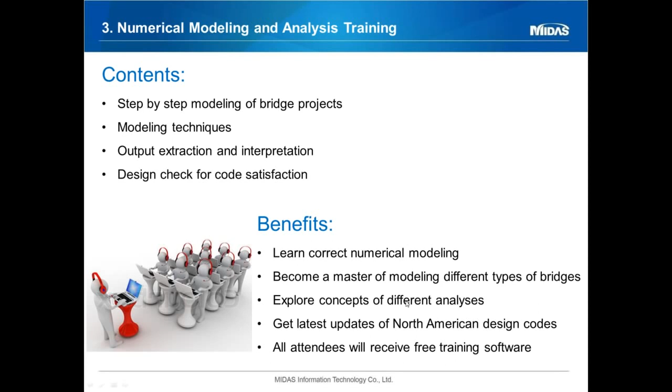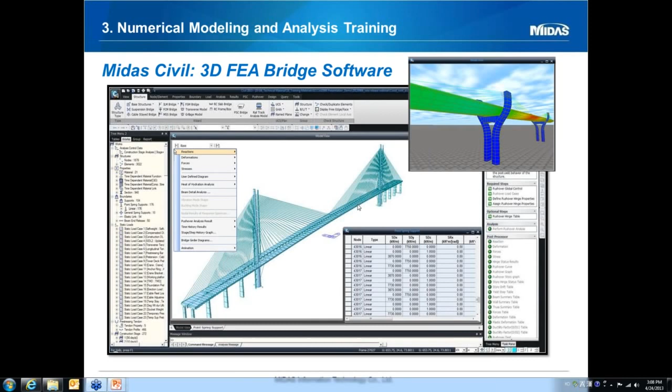Thank you. So today I'll be speaking about the modeling of a geometrically complex box girder bridge. Here's a brief overview. First I'll be discussing the bridge geometry of the structure that I worked on. Next I'll be going into the model requirements, what we needed from these models, the evaluation of various model types, and the modeling approach for both a grillage and a plate model.

I'll also discuss some of the challenges faced and the solutions I came up with for this project, and I'll discuss the methods that I used for evaluating the data.

So here is a plan view of this structure. It's a local bridge over Interstate 70 down here in Denver, Colorado. As you see, it's not symmetric in any real way. You have the flared webs out here that bifurcate.

So out here on the wide end, we have 6 webs. Get here towards the middle, we're reducing that down to 4. These webs vary along the same radius, but they terminate at different locations.

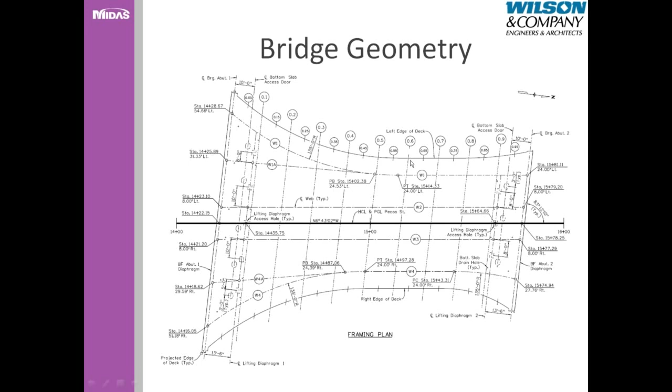And if you'll note these lifting diaphragms here, those were used in, well, will be used in moving the structure once it is completed.

Here's a look at a few of the cross sections of this bridge. You'll see that the key word is 'varies' - nothing is staying real constant along the length of the structure. I think the only thing that does is the spacing between webs 2 and 3. That remains 16 feet throughout the entire length of the bridge. Just about everything else changes.

This illustration up top is showing you a cross-section between abutment 1 and the first lifting diaphragm. In this region, the top and bottom slabs are constant thickness - a foot on the top, 8.5 inches on the bottom. And then we have the overhangs that vary in thickness and width.

In between the lifting diaphragms, this bottom slab varies. The way it was constructed, it varies linearly from lifting diaphragm 2 to lifting diaphragm 1, or vice versa.

So it's thicker at the wider end of the bridge, and it gets thinner as we get towards the narrower side. Up here, the deck varies in thickness. It's haunched over all of these webs.

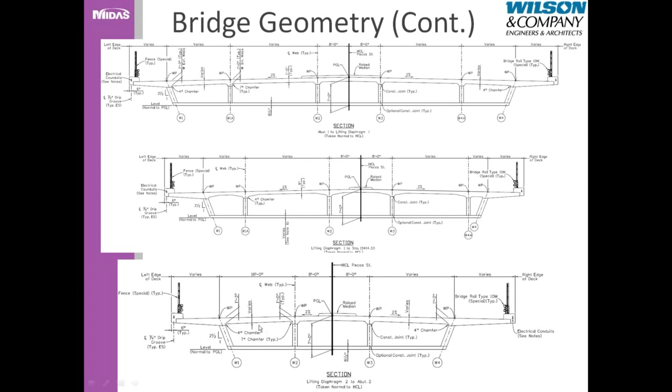Out here, we're looking at lifting diaphragm 2 to abutment 2. This is pretty similar to the other end, where the bottom and top slabs are constant thickness, except out here in these exterior voids, where we're going from 1'3" to 1 foot.

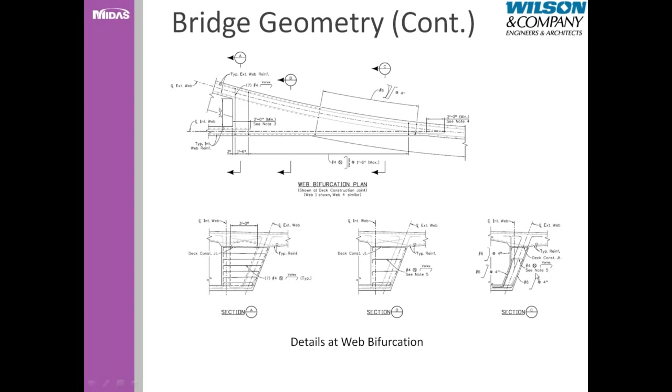Here's a closer look at the web bifurcation. There's kind of a transitional zone here where there's some extra concrete. Take a look at section A - you can see that this gap between the webs is filled with concrete. As we get closer to the termination of this web, this is the cross-section here.

So just kind of a summary of what this bridge is. It's one simple span, a little over 150 feet, 156 feet long. It's a cast-in-place, post-tensioned concrete multicellular box girder with about a 6 3/4 degree skew.

The width varies from 54 feet to 117 feet, and the web spacing varies from about 16 feet to 23 feet. One thing that made this project interesting is that it is being built off-site and will be moved in place using SPMT equipment. Internal and external post-tensioning was used for the structure.

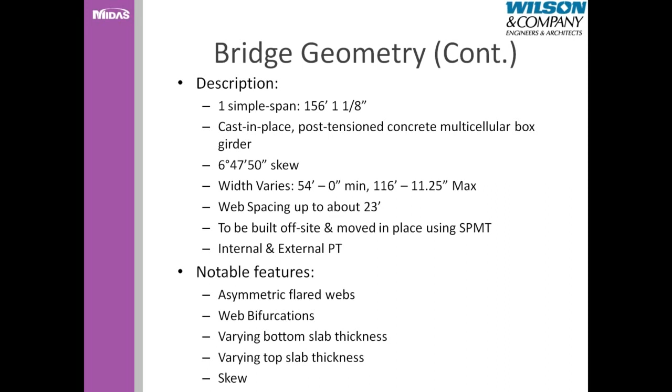Some notable features, especially in terms of modeling this bridge, are the asymmetric flared webs and deck edge as well. The web bifurcations, the varying bottom and top slab thicknesses - it's dependent on location - and the skew of the bridge.

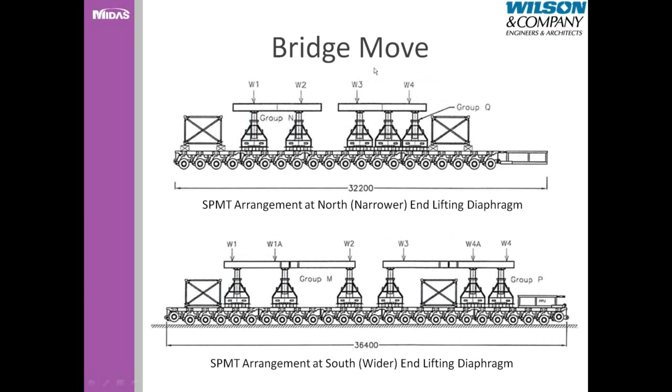Each of these mega jacks in each group are going to be set to where they have equal reactions. They'll be hydraulically connected to maintain that requirement. So both of these will have the same reaction throughout the entire move, same as these three together, and these three together. The different groups will have different pressures and reactions, but within each group it will be the same.

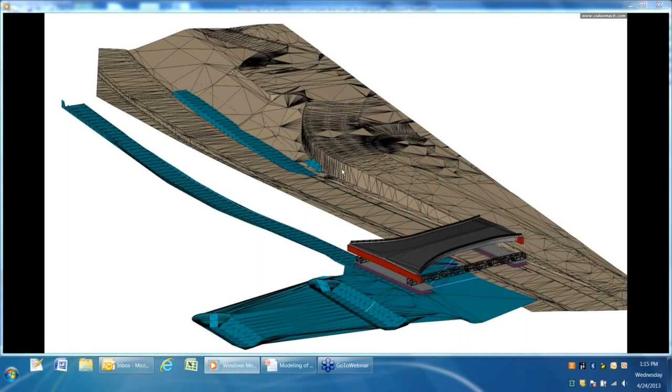Here's a brief video showing the move itself. Due to the site where they built it, they're going to have to drive it out onto the interstate and turn it around 180 degrees. You see the blue here - that represents the dirt work that's going to have to be performed between the closing of the interstate and this move actually taking place. And you can see it's going to drive right there into its final location.

So now I'll discuss the model requirements, what we were looking for from the models that were created. First thing is really the thing you're looking for anytime you're making a model - we're aiming for a realistic distribution of forces, especially during the SPMT move. We're looking for a good idea of the forces in the diaphragms. We wanted accurate bearing reactions, considering the elastomeric stiffness.

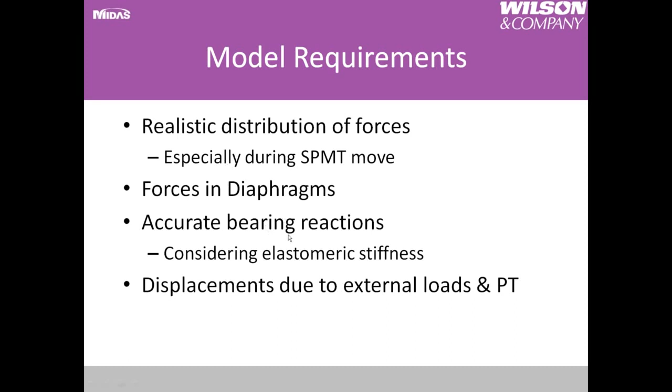We're looking at the displacements due to external loads and post-tensioning. We also wanted to know about the global torsion in the final condition, and we're especially looking at this during the move.

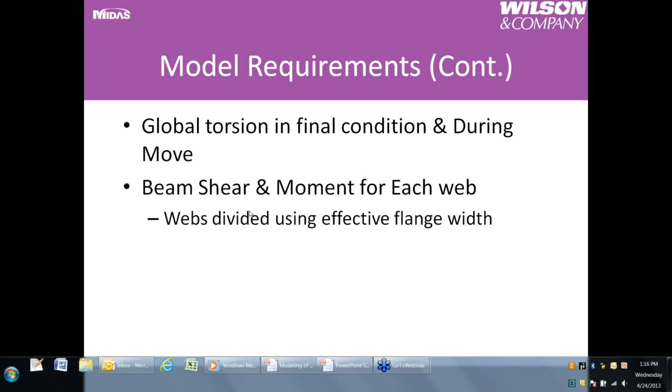And we were designing a bridge, so we're looking for beam shear and moment. The way it was designed, each web line was designed individually, so the webs were divided using the effective flange width. So from the model, we needed the shear and moment.

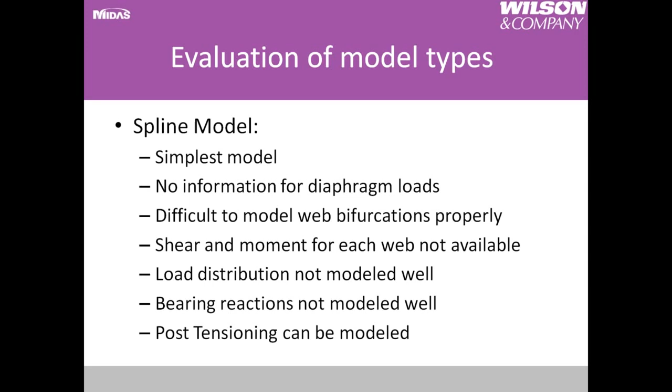So here's a little evaluation of the various model types that were considered. The spline model wasn't considered real closely - this is the simplest model. It gives no information for the diaphragm loads. It's difficult to model the web bifurcations well. The shear and moment for each web are not available - it just gives you one value for each location along the length of the bridge. The load distribution is not modeled well, and bearing reactions are not modeled well. As a plus, post-tensioning can be modeled in there.

Next step up is the grillage model. This is a relatively simple model. The diaphragm loads are not as accurate as those from a plate model. In this case, we can model the web bifurcations with a little more accuracy. The shear and moment for each web are readily available from this model, so that was a plus. The load distribution is not modeled as well as it was in the plate model - it doesn't consider everything that's going on in this box girder. The bearing reactions were not as accurate as those from the plate model, and the post-tensioning can be modeled well using the grillage model.

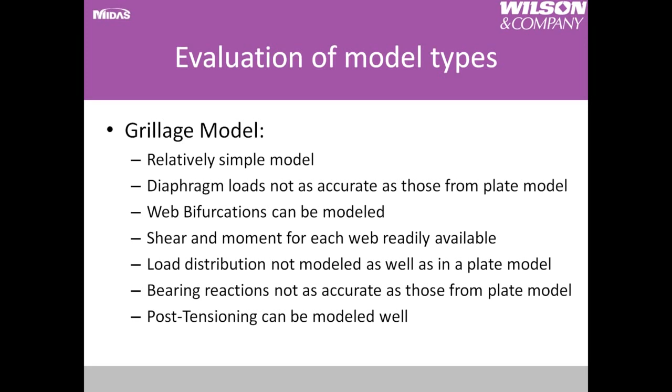Taking a look at the plate model, this is the most difficult to model.

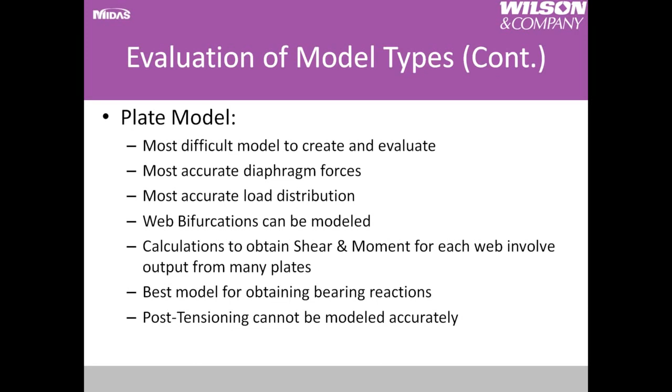It's the most difficult model to create and evaluate. It's the most accurate in terms of the diaphragm forces, in terms of the load distribution, and for the bearing reactions. Some of the negatives of the plate model were that the calculations to obtain shear and moment for each web involved the output from many plates and required a fair amount of work to obtain those. And the post-tensioning could not be modeled accurately.

So the models selected for this bridge were a grillage model and a plate model. We used the grillage model to ensure reasonable results from the plate model. That was important since going into this, the plate model is fairly complex, so it's worthwhile to put forth a simpler model to validate what we're doing in the more complex model.

I used the grillage model to get information about the post-tensioning, so that was looking at losses and also deflections. And also the bridge rating was performed using the grillage model. Main reason for that is that the model input and output were far more easily interpreted than the plate model. And I felt that was a worthwhile goal when considering the bridge rating.

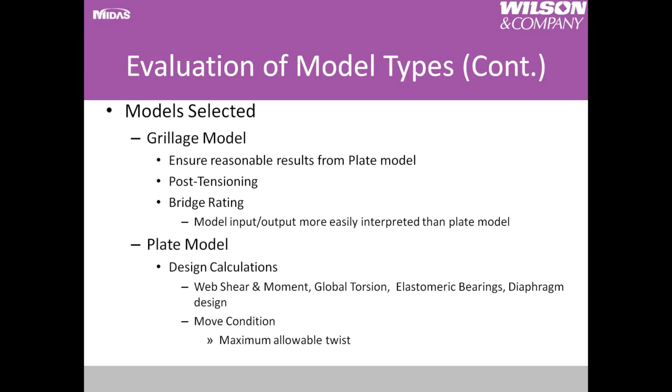The plate model was used mainly for the design calculations, including web shear and moment, global torsion, the elastomeric bearings, and the diaphragm design. This model also came into play for the move condition. I feel it was very important when considering this move condition, since it did do a good job considering the different variables at play for this bridge.

So the modeling approach. First model created was the grillage model. First step was to determine the node locations. Next is to create member cross-sections.

The south half of the bridge has at least one dimension varying with respect to distance along the bridge. As a result, there were many unique cross-sections. The next step was to create elements and assign cross-sections to the elements. Then the boundary conditions could be put into place.

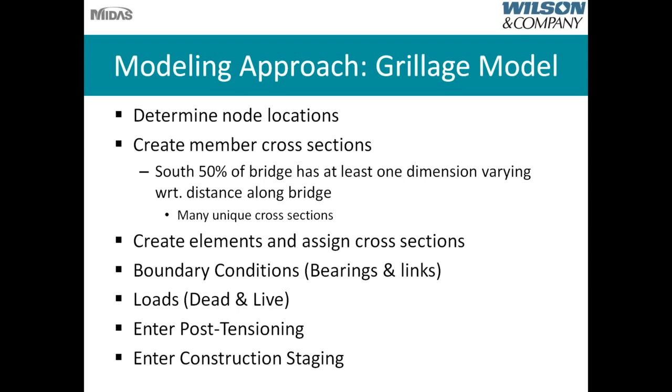So that's the point springs for the bearings and the rigid links to connect the two exterior webs together at the bifurcation, and also to connect the top and bottom slab for the transverse elements and connect the transverse elements to the longitudinal elements. Next, the loads had to come in, and the post-tensioning and the construction staging to get a good feel for the time-dependent effects on this structure.

So here's kind of an overview of the grillage model. The top image is showing you the grillage model longitudinal members only. Midas allows you to take a good look at the geometry you're putting in. Each of these cross sections was entered individually.

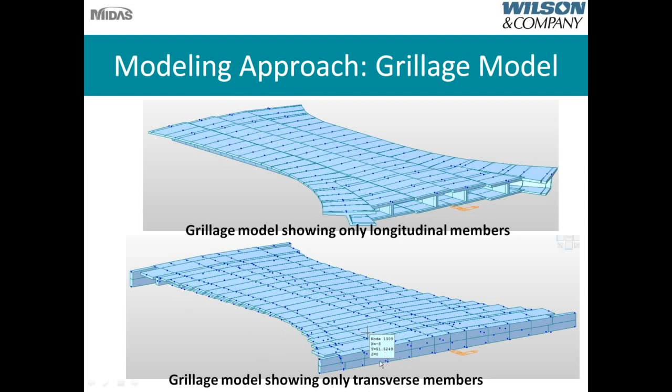And then taking a look at the transverse members here, we have the top slab, bottom slab, the end diaphragm, and the lifting diaphragm.

Looking at the plate model, first step was to determine the node locations. This required significantly more effort for the plate model than it did the grillage model, since there are many more nodes, more things needing to be defined.

Next step was to define plate thicknesses to represent the concrete along the bridge. Then the elements needed to be created and the thicknesses assigned appropriately. Next step was to input the boundary conditions.

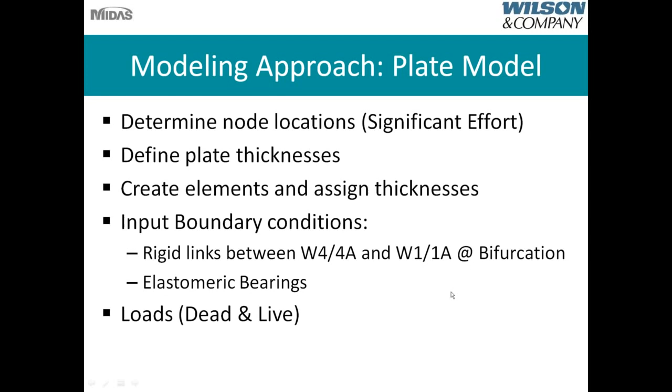So rigid links were placed between web W4 and 4A. Again, at the bifurcations, they're rigid links. And then the elastomeric bearings were modeled using point springs. Next, the loads were put in, dead loads and live loads.

So here's the plate model that I created for the structure. This top view shows, as you would be looking at the bridge from an isometric view, you see the bearing diaphragm out here at the end. On the top, you see all the deck elements, and then you can kind of see the diaphragm poking through here too.

Here is a view with the top deck hidden, basically inactive, so you can see the webs and the diaphragms with more detail. You can see in here, these are the lifting diaphragms, and then you can see along this web where the bifurcation takes place, these webs were thickened to represent that transitional area where there was more concrete placed to kind of stiffen up and strengthen that connection. Same thing over here.

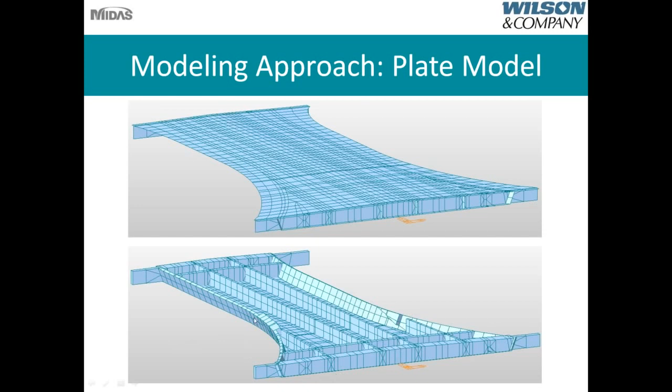So some of the challenges encountered. Grillage model wasn't too bad. Main hang-up was the creation of member cross-sections and changes in geometry, so those kind of go together.

In terms of the plate model, there's obviously the geometric complexity, so that involves some time getting the node locations and assigning the thicknesses appropriately. Data interpretation required much more effort than with the grillage model. The beam shear and moment for each web were not direct outputs from this model. I'll show you later how I put that all together. Global torsion as well, same kind of thing.

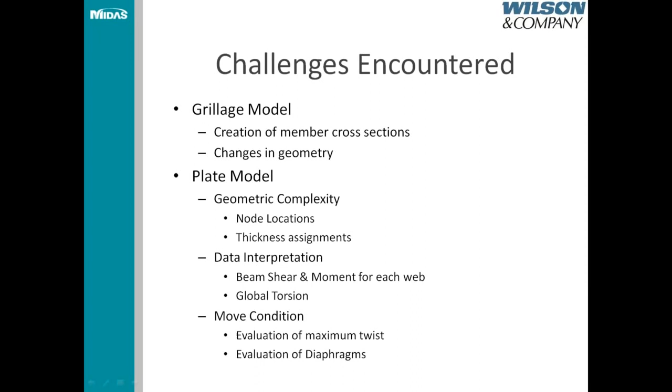And then for the move condition, had to determine kind of how to evaluate that, looking at the maximum twist and the effect on the bridge as a whole and on the diaphragms.

So here's some solutions, the way I solved them. For the grillage model, the creation of member cross-sections was aided using a drawing in MicroStation. So I used the plan that was created by the drafter and created a drawing with dimensioned section segments. I entered these dimensions for each segment into Midas. I chose not to use the section property calculator tool that they have. This was mainly so that I could check the geometry as I put this model together.

Name the cross sections for easy identification. So, for example, I guess this kind of letter string here represents Web 2, Section 2, so W2S2, lifting diaphragm to transition 1. Transitions were the start of where those webs were thickened as the webs came together on the exterior webs. Since most segments were tapered, the cross sections of each web at each location were changed, location of change, and the geometry were entered. Then those sections were copied to the tapered section to reduce data input.

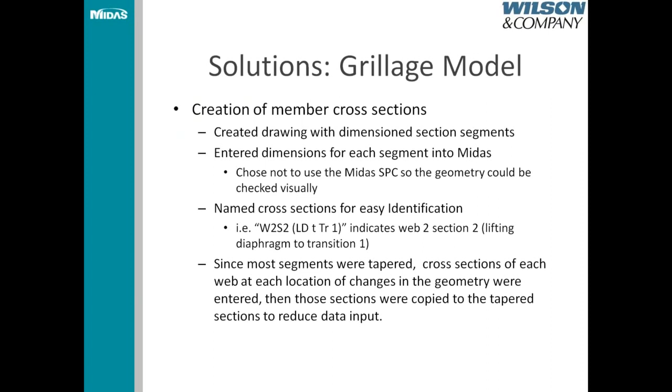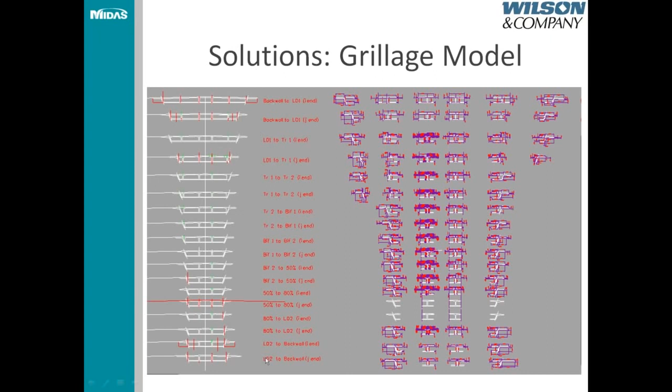It includes the web itself and the effective flanges. Then out here where the bridge narrows, there's only 4 web sections per location. I labeled these back wall to lifting diaphragm 1, I end and J end. So this is basically at the back wall or above the supports, and this is at the lifting diaphragm on this side of the lifting diaphragm before the bottom slab thickness begins to vary, and similarly for the remaining sections.

Here's a close-up on one of those sections. I believe this was the first location. So this is that exterior web section with all of the relevant dimensions labeled, which were subsequently put directly into the Midas software.

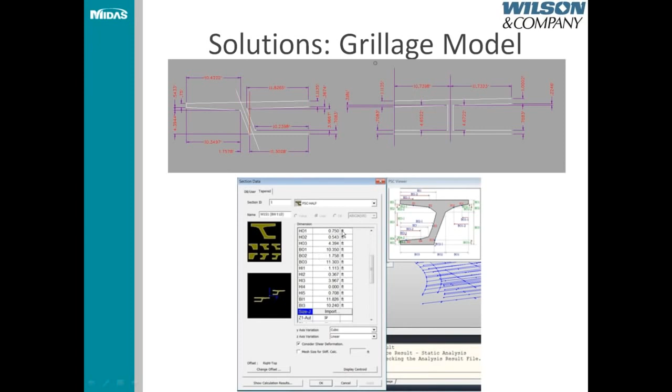The node locations at the webs at the top of the deck were measured relative to a reference point and entered manually into a spreadsheet. From there, I was able to calculate the remaining node locations.

When possible, nodes were placed in the same location in the plan view for the top and bottom slab. In the top slab, nodes were placed at the end and middle of the deck haunches. Nodes were placed to maintain similar plate dimensions along the width of the bridge. Was aiming at square elements as much as possible. Some locations that didn't really work out.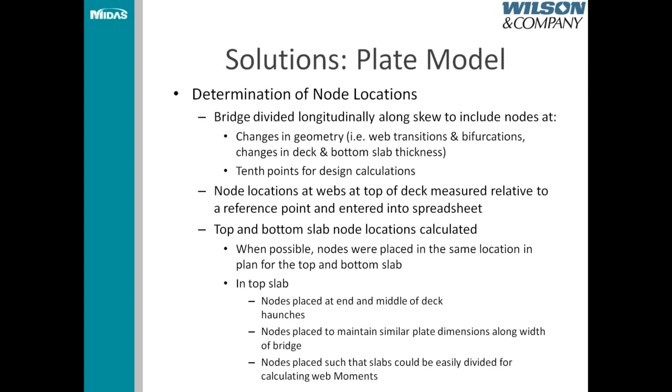The nodes were placed such that slabs could be easily divided for calculating web moments. So you saw a couple slides ago we were looking at cross sections that were broken up into various elements. Made sure that there was a node where those elements were divided. And then here is the plan view of the plate model.

So in terms of thickness assignments, the average plate thickness was used when there were tapers. Nodes were placed at the center of gravity of all plate elements. The beam shear and moment for each web, the output that we were looking for was beam shear and moment for each web element, which consisted of the web itself and the effective top and bottom flanges.

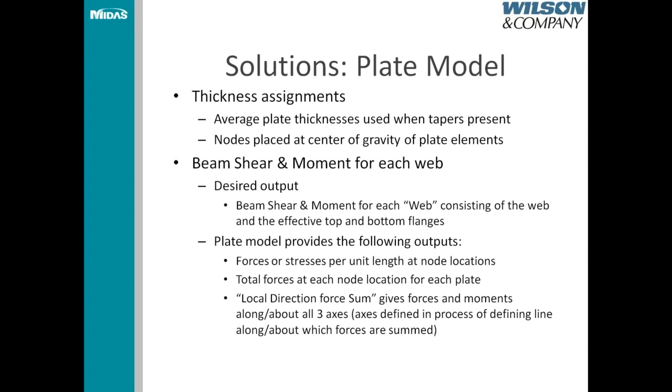The plate model provides the following outputs. We're looking at forces or stresses per unit length at each of the node locations. The total force at each node location for each plate. And there's also a tool called the local direction force sum. So this gives forces and moments along or about 3 axes. The axes are defined in the process of defining the line along and about which the forces are summed.

So to get the desired output from the model, I had to combine the axial forces in the flanges with the flexure and eccentric axial force in the web plates to get the total moment for each section. The forces in the flanges from the plate force tables were used, so for each of the flanges, I was able to put together a spreadsheet using tabular output directly from Midas.

The web forces were obtained using the local direction force sum tool. A large spreadsheet was used to efficiently convert the output from the individual plates to the beam shear moment that we're looking for. The moment was determined as follows.

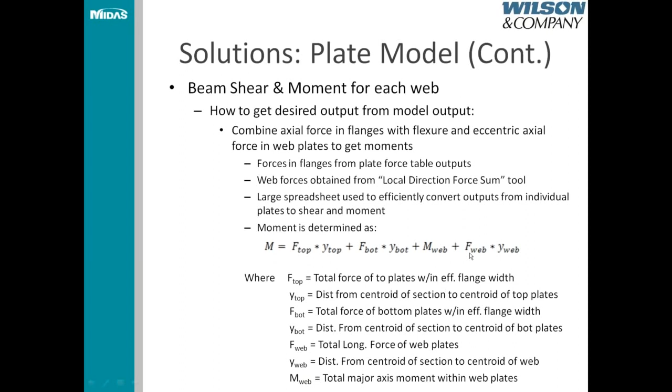Your moment is equal to the force in the top flange times the distance between the centroid of the top flange and the centroid of the section as a whole, plus the force in the bottom flange times the distance between the centroid of the bottom flange and the centroid of the section as a whole, plus the moment in the web that was pulled out using that local direction force sum, plus the axial force in the web times, again, the distance between the centroid of that web and the centroid of the section as a whole.

To get global torsion, this following equation was used for that. The torsion in thin wall sections can be determined using this equation.

So your torsion is equal to the sum of A sub I, which is the area enclosed by the center line of the elements surrounding the ith void, times Q sub I, which is the shear flow in the ith void. The shear flow in the webs included both the beam shear and the torsional effects going on.

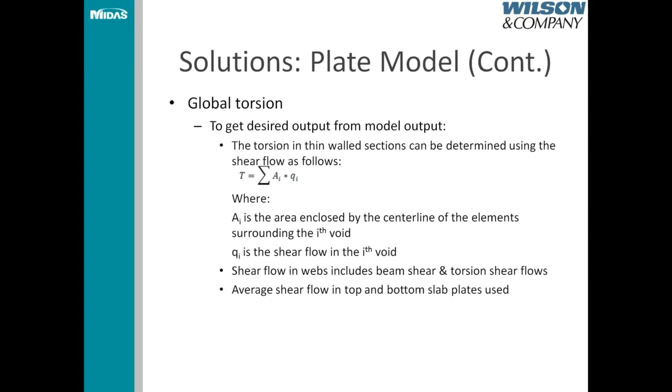That caused the shear to increase on one side while decreasing on the other. Instead of trying to separate those two effects for the webs, I chose to only consider the top and bottom slab plates in calculating that torsional moment.

Then looking at the move condition, in terms of the allowable twist, the global torsional cracking and diaphragm overstress were used as criteria. In order to do this, the supports were placed at each web location at each of the lifting diaphragms.

A unit twist was induced at the narrow end of the bridge at the lifting diaphragm using the specified displacement feature within Midas.

This twist was entered by entering these specified displacements along a line. So all four were displaced: the two on the left side went up, the two on the right side went down along a line.

So the twist angle was then scaled to reach the cracking torsion, and the twist angle was also scaled to reach diaphragm failure. So obviously the forces, the global torsion needed to be calculated, and the diaphragm loads needed to be calculated under a unit twist and then scaled.

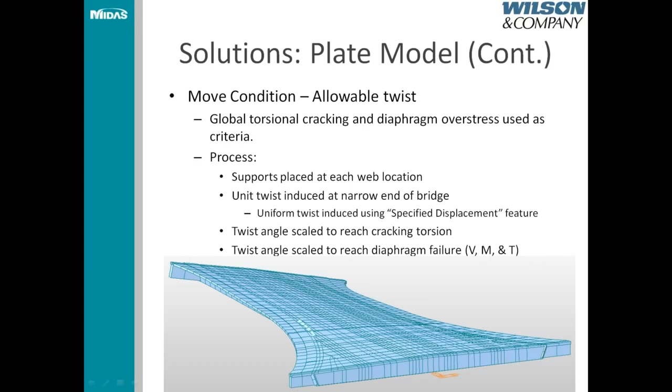So this section is kind of what I was doing a lot of the time for this project: the data evaluation. The Grillage model yielded the required results directly. We were looking for shear and moment, and that was a direct output.

We were looking for displacements, and again that was a direct output. The live load forces, in some cases, required the use of the live load tracer feature. So when you're considering shear, you want to use the same truck location that's giving you the maximum shear to get you the moment at that section when you're using the modified compression field theory to calculate your shear resistance.

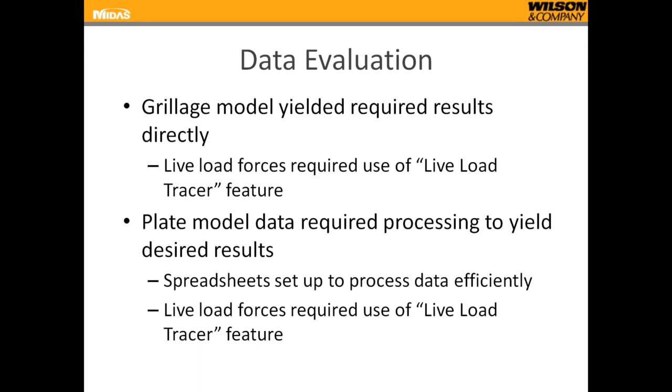The plate model data required processing to yield the desired results. Spreadsheets were set up to process the data efficiently, and the live load forces required, again, the use of this live load tracer feature. I mentioned this a couple times, so here's kind of a description of what this tool is: envelope forces potentially are inaccurate since the maximum force in one plate may be controlled by a different load case than another plate in the same segment.

Part of the process for getting the moments along the webs was getting the axial force in the plates that made up the top flange. In that top flange, there might be 10 different plates. It's possible that axial load is maximized in one plate by a different truck location than another plate within that same segment, so you'd be overshooting your moments if you used envelope forces for everything.

The live load tracer gives the live load that maximizes a force effect at a specified node of a specified plate.

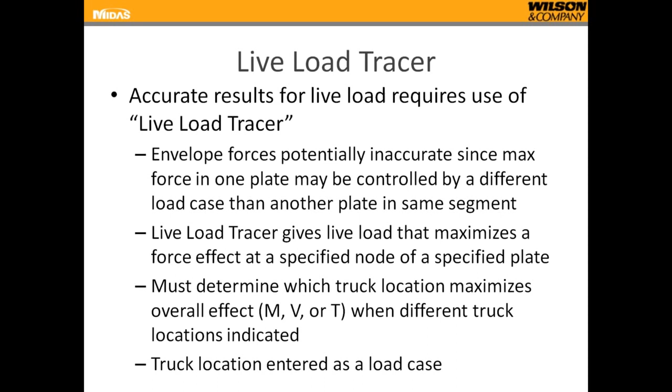Like I was saying, there are multiple plates that went into determining the moments in this structure. Part of the process was determining which truck location maximizes the overall effect—shear, moment, or torsion—when different truck locations are indicated for a single element. The truck location given by this tool was then entered as a load case.

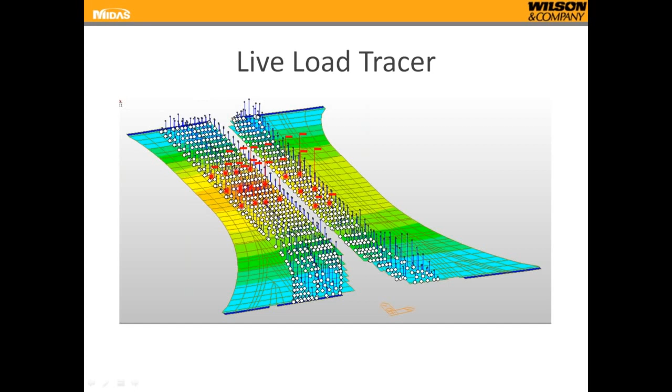Midas gives it as a text file, which can later be input as a load case. So if I'm trying to maximize moment in the web that sits under here, and I found this was the controlling truck location, I could export these loads and import them again as a load case, and use that to calculate the moment and shear.

The spreadsheet I use for moments requires a significant amount of data. The first step is the data reduction sheet for the flange forces. One sheet was created for both the top and bottom at each of the 10th points. The raw Midas data output was entered, and the total force in the flange was automatically calculated from there.

I was able to copy a table from Midas and paste it into my spreadsheet, and it would update the flange force for that location. Then there's the compilation sheet, which takes all of the results from these—I think there are 18 of these, since I didn't do either end of the bridge for moment.

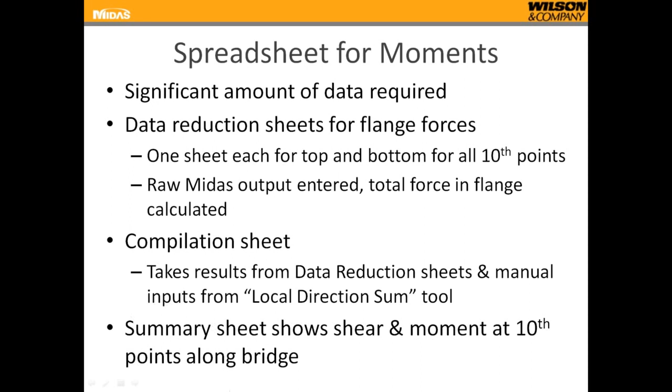The compilation sheet takes all 18 of those spreadsheets, extracts the flange forces, and also gives me a place to put the local direction sum results from the webs. The summary sheet shows shear and moment at 10th points along the bridge. This is the final sheet, which gives the results needed for design.

Here's a screenshot of one of the data reduction sheets. Here we have the raw Midas data. I selected the plates relevant to this section—this is the bottom flange at lifting diaphragm 2. All of these plates were needed for that location for the moments.

Before I go further, there would actually be four of these since this is for live load. The load case here is for the HL93 truck at lifting diaphragm 2, with the truck placed to maximize moment in web 1. There was a different truck location to maximize moment for web 2, so those results were copied over here.

Also for web 3 and web 4. Over here, that was reduced a bit by determining which plates are associated with which web. Plates 3135 down to 3435 were associated with web 1, so the results for web 1 are all here. For web 2, plates 3485 onto something else down here were associated with web 2, and here are the results for that.

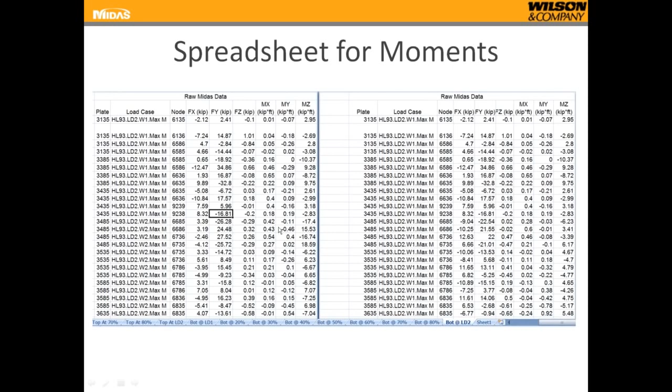From this table, I created this table, which boiled it down a little further. So for each web, there are the elements here, and which load case was used, just to avoid any errors. I could verify that for W1, we're looking at HL93 load for lifting diaphragm 2 to maximize moment for web 1 here, and then for web 2, similarly for web 3 and web 4.

Only some of these nodes were used for obtaining the flange force. That's because we were essentially cutting the structure along a line, so I only needed to consider the nodes that lied on that line—that's 6136, 6586 here, all the ones in bold.

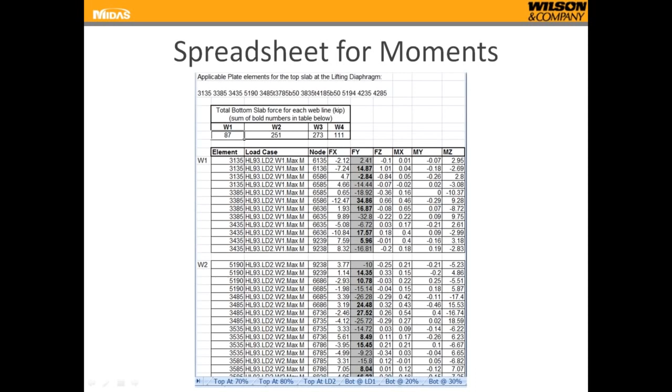You'll notice up here there's a string of numbers used to simplify the process of getting results out from Midas. I could copy this and paste it into Midas where it asked which elements you're looking for in terms of plate forces, and you would get these tables, which would update all of this, giving you the flange forces, bottom flange forces, for each of the webs. This sheet was duplicated for the top and bottom at each of the 10th points, except for the ends.

From those, this sheet was used to extract that data and summarize it. So let's take a look at the 20% location. In the top of the slab, there's about a 250 kip force in compression. In the bottom of the slab, 76 kips in tension. Here it shows the Z location of the centroid of the top and bottom slab and of the web.

These inputs were entered using that local direction sum tool, so I could get the shear, the moment within the web, and the axial force within the web, along with its Z location, the location of its centroid. Up here is the elevation for the center of gravity measured from the bottom of the bridge for each of the webs at each of the locations. These were all extracted from the sections that were created for the grillage model.

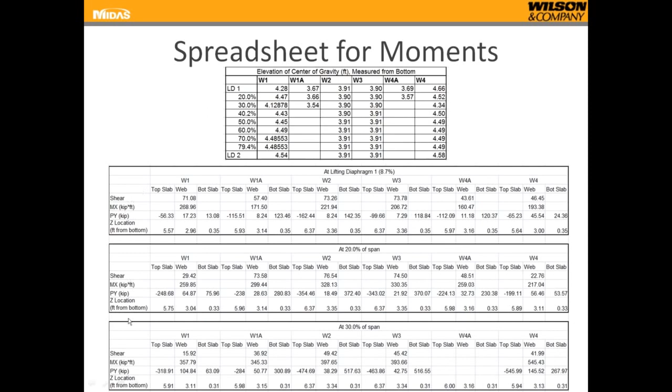So the final result uses all of the data that was entered into here and here, as I mentioned earlier. Your moment is the moment in the web plus basically the sum of all of the axial forces times the distance between those axial forces and the centroid of the section as a whole. The shear comes directly from that prior sheet, that's just a straight entry. The moment used this equation.

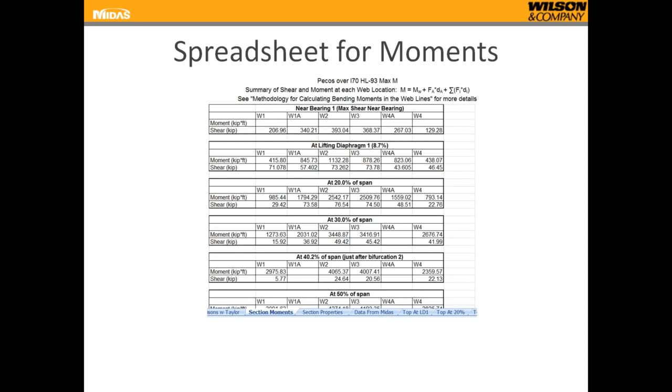And then the spreadsheet was created for each load case. So there's HL93 trucks positioned to maximize moment, one where the HL93 trucks were positioned to maximize shear, and then one for all the dead loads, and also for the permit truck.

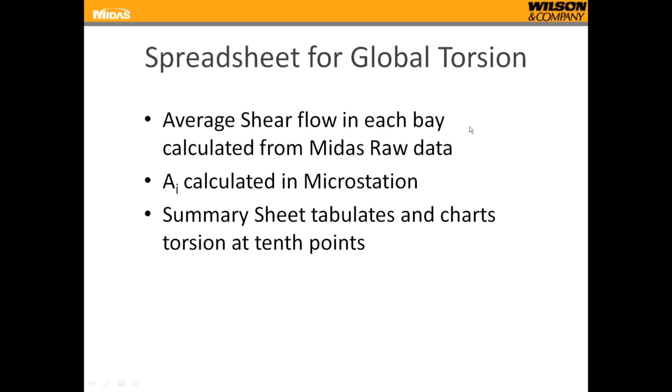Spreadsheet for global torsion. The average shear flow in each bay was calculated from raw data from Midas. A sub I was calculated in MicroStation using that drawing I showed you earlier that had all of the cross sections for the various locations. And a summary sheet was used to tabulate and chart the torsion at the 10th points.

So here's the spreadsheet for global torsion. This is the raw data from Midas for the HL93 loading at the 50% location, and the truck was placed to maximize torsion at 50%. You see here the various elements associated with the 50% location for all of the top plates, and each of the nodes along with the center. We have the shear flow and then the force per foot for each of the axial directions.

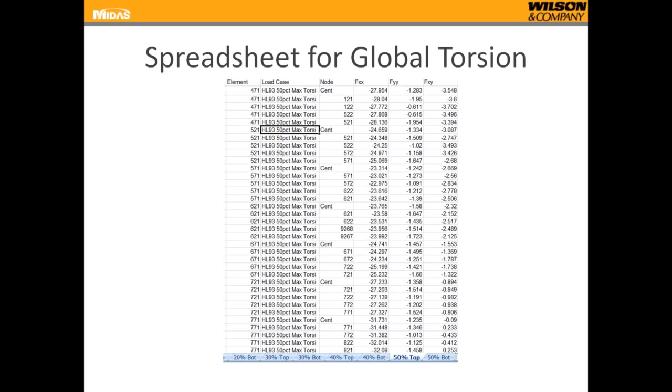From that raw data, I could put together this spreadsheet, which summarizes that data, takes only the nodes that are relevant, and uses VLOOKUP to get the appropriate shear flow values. Since they were not constant along the width of the void, an average was taken. So there was an average value for cell 1, cell 2, and however many cells were at the given location.

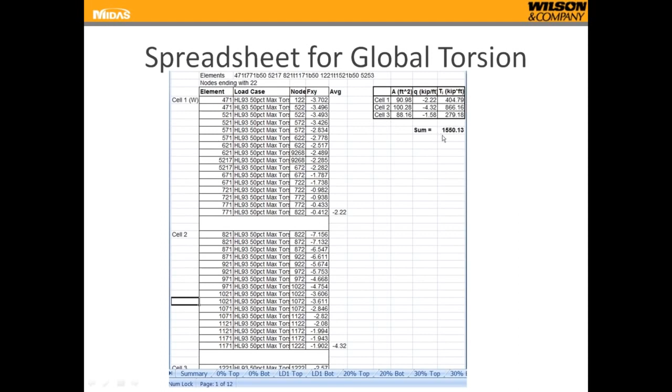These are referenced up here. So you have 2.22 for cell 1, Q sub I for cell 2, 4.32, and then A sub I again, that was taken directly from the MicroStation drawing. The T sub I is the contribution to torsion for cells 1, 2, and 3. The sum of that is the torsion at that cross-section.

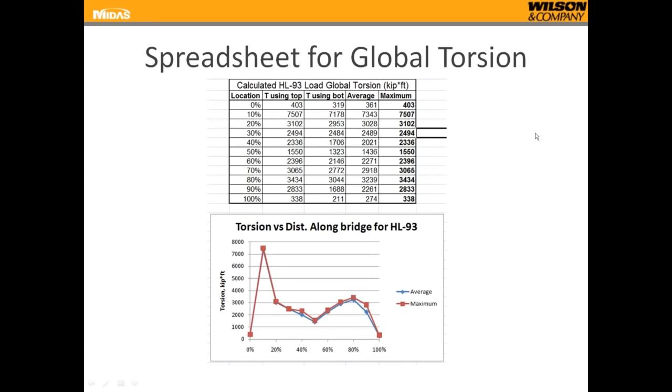Here's the summary sheet for the global torsion. It gives you the location, the torsion if you're using only the top plates, torsion if you're only using the bottom plates, the average of those two values, and the maximum of those two values. Here I plotted out the maximum and average for each, just to get a feel for how torsion was distributed along the length of the bridge, and to see if there were any outliers.

For out-of-plane bending and interface shear, these were pretty much direct output from Midas and just compiled into a spreadsheet, labeled where different elements were that were throwing off the values, causing them to be much larger or much smaller than for the rest of the structure, such as the diaphragms and the bifurcation.

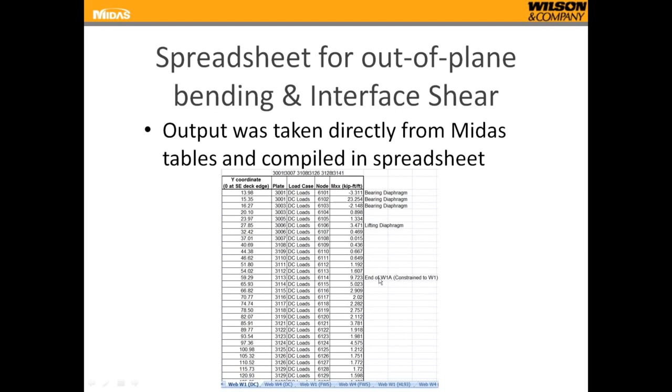Last thing I'll talk about was the evaluation of the move condition. The heavy lifting contractor proposed a certain arrangement for the SPMT equipment. This was shown towards the beginning of this webinar when we were looking at the geometry of the structure. So there's a load spreading beam placed between the bridge and the megajacks. The megajacks were placed beneath each of the spreading beams, and were hydraulically connected under each of the beams.

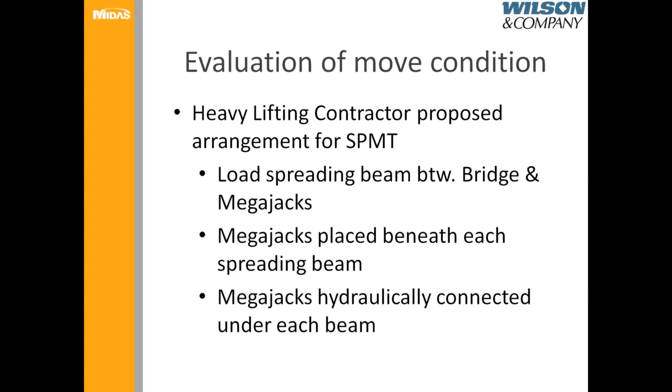To model this took a little bit of manipulation of the support stiffnesses. If rigid supports were used, the reactions were not equal, but during the move, those forces along each of the load-spreading beams will be forced to be equal since they are hydraulically connected in each group. Point springs were used to force this condition into the model, and the stiffnesses were adjusted to equalize the reactions at each of the megajacks.

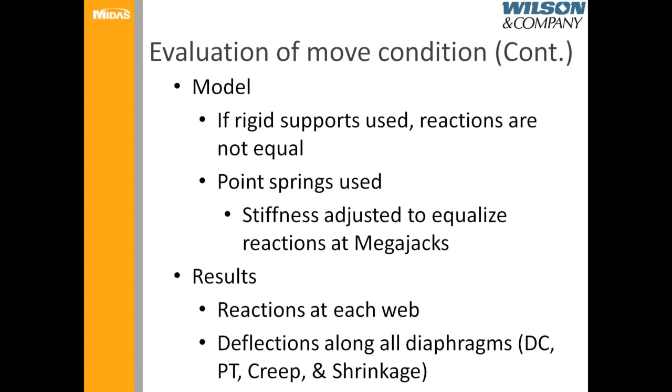From there, the reactions at each of the webs, the bridge itself, could be checked, and the deflection along all of the diaphragms could be checked. So that's for dead loads, post-tensioning, creep, and shrinkage. We wanted to see how much this bridge is going to go up or go down at the end due to the different loading conditions, so the contractor moving the bridge would know how high he'll need to lift up the structure to get it onto the bearings.

So a couple conclusions. The plate model, in my opinion, should only really be used when the geometry and required information precludes the use of simpler models.

The results from the grillage model and plate model did compare well for longitudinal shear and moment. But again, we did need more information than that. We were looking at the move condition, which required a little more of a detailed model, and we were interested in accurately obtaining the bearing reactions along with the diaphragm forces.

The grillage model was definitely simpler to create and far simpler to interpret. If a plate model is required, I recommend that spreadsheets be used to automate much of the input, especially if you're looking at a bridge like this where the geometry is irregular.

It's probably the easiest thing to do that in a spreadsheet rather than trying to do that in the graphical user interface. Another tip is to create spreadsheets to use the Midas output as efficiently as possible. So those are the spreadsheets I showed you for getting shear and moment and global torsion. I was able to grab the tables out of Midas, copy them into the spreadsheet, and it would update the forces that I was looking for.